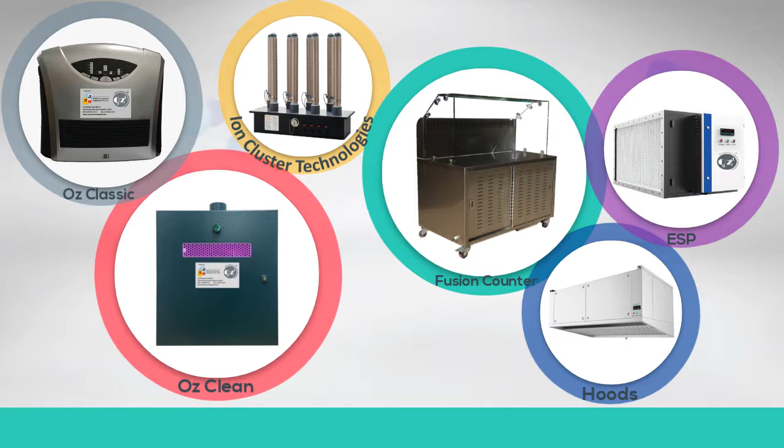Good day to all. The hybrid air cleaner system kitchen exhaust hood is a modern wonder which comprises of a functional kitchen hood with an electrostatic precipitator built into the hood. Similarly to the OZ Clean system, this solution can solve three common issues from cooking: smoke, grease, and odor. The following will be a detailed description of the product.

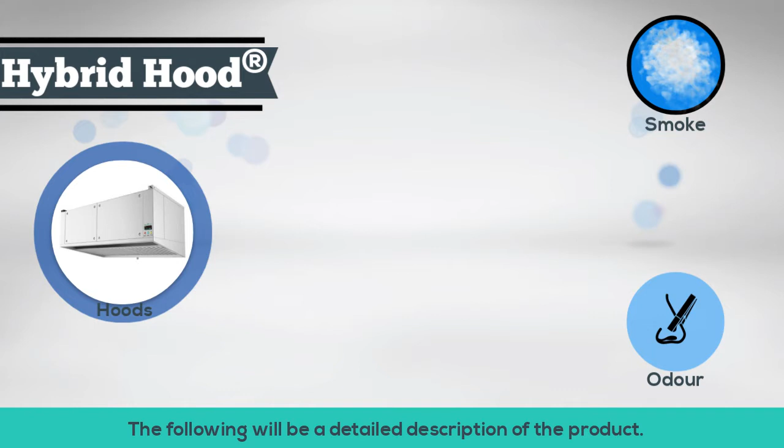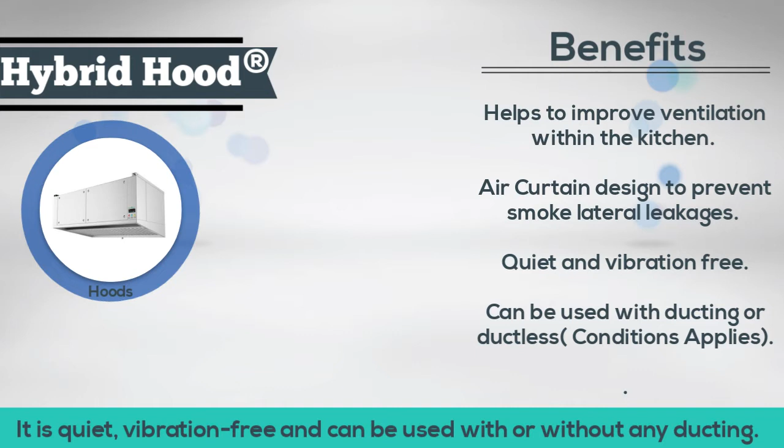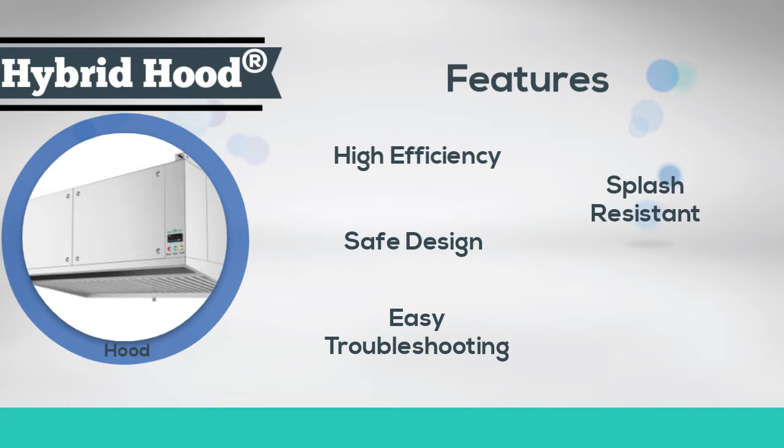The hybrid hood helps to improve ventilation within the kitchen. The air curtain design is made to prevent smoke lateral leakages. It is quiet, vibration-free and can be used with or without any ducting. Moving on, the hybrid hood consists of these features: high efficiency, safe design, easy troubleshooting, splash-resistant, durable.

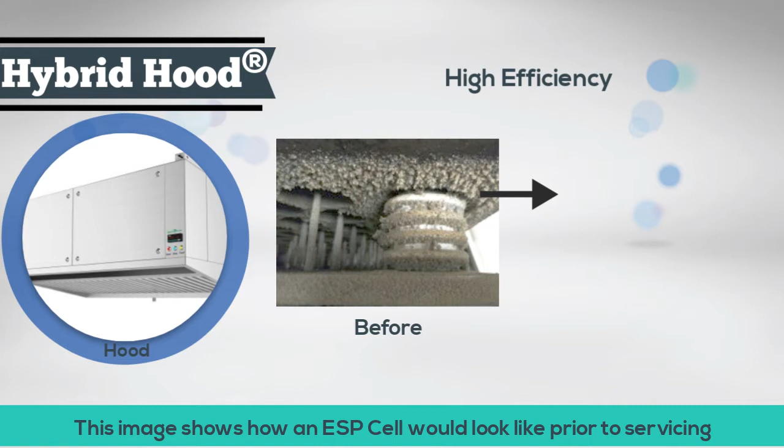Firstly, the hybrid hood system is highly efficient. This image shows how an ESP cell would look like prior to servicing. With our technology of the honeycomb ESP, incombustible oxidate are formed on the surface of the ESP cell, which makes cleaning easier and cooking safer for our users.

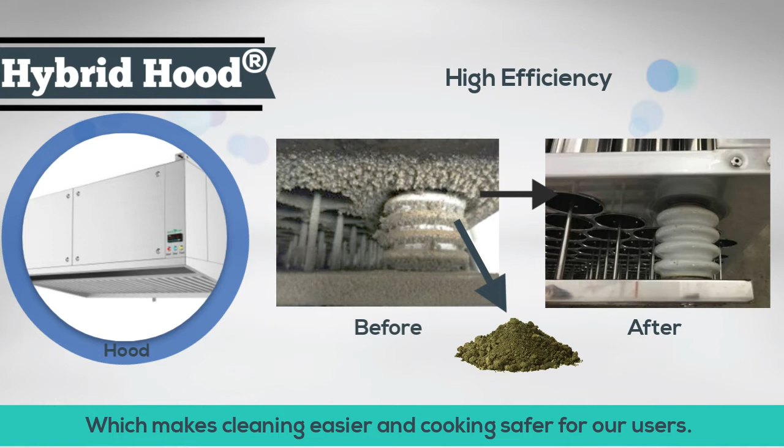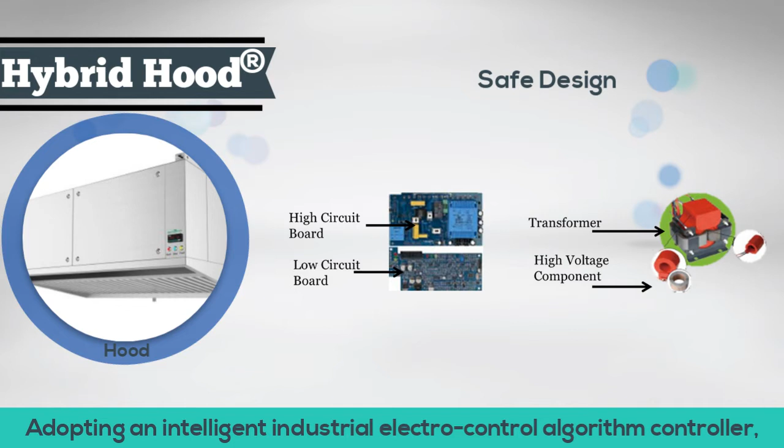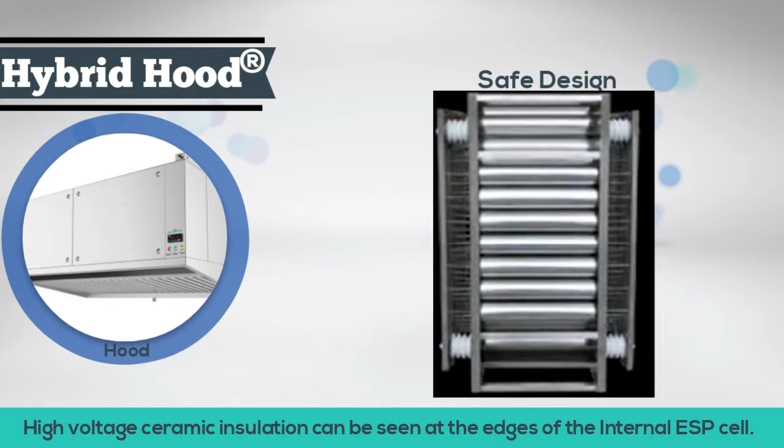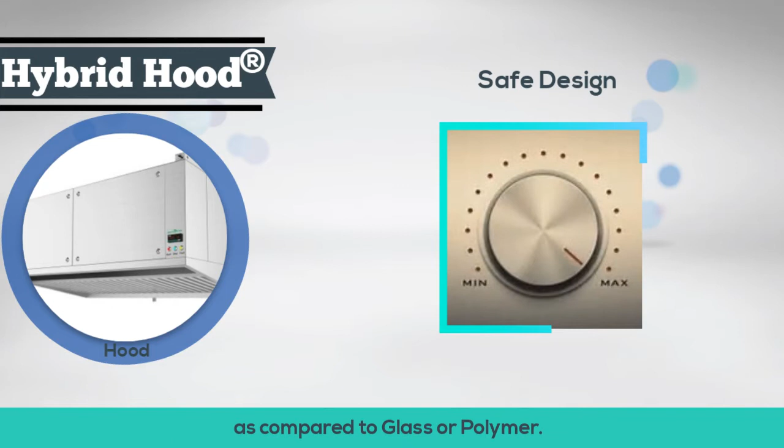Secondly, the hybrid hood system has a safe design, adopting an intelligent, industrial electro-control algorithm controller; control and setup of automation protection for cells short-circuit situations are incorporated within the system. High-voltage ceramic insulation can be seen at the edges of the internal ESP cell. It is not just environmentally friendly, but has a higher insulation quality as compared to glass or polymer. A knob is installed as well for easy adjustment of amperage.

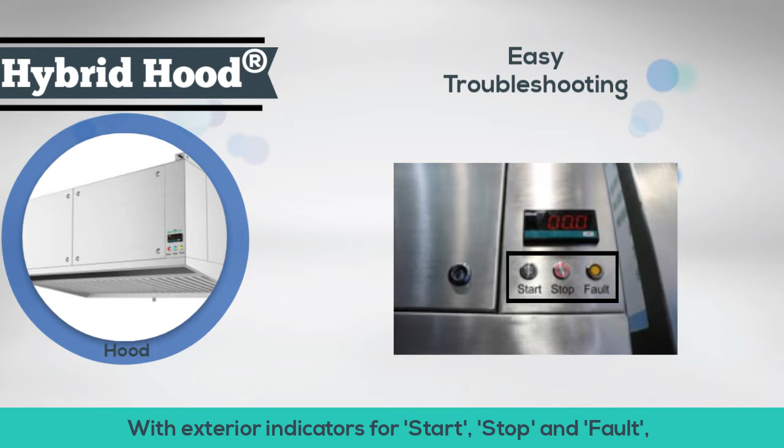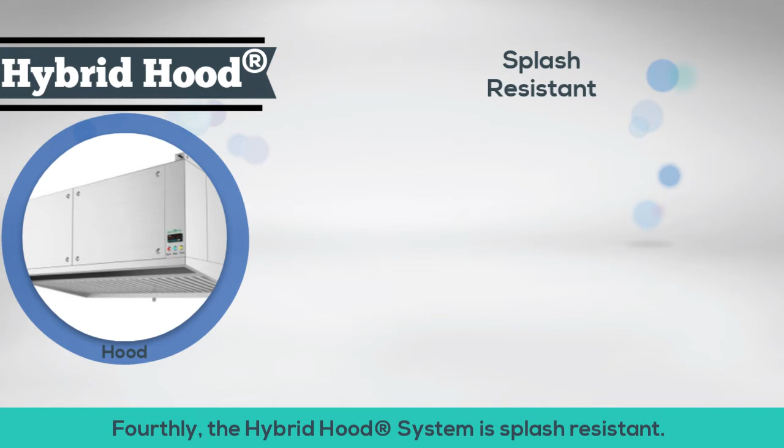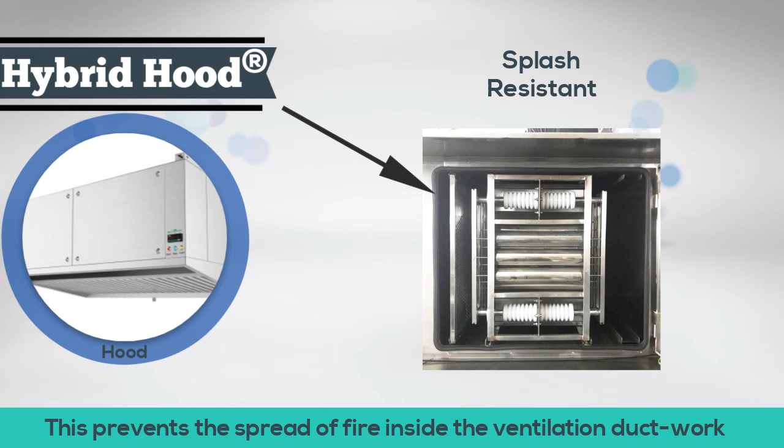Thirdly, the hybrid hood system is easy to troubleshoot. With exterior indicators for start, stop and fault, it allows for quick troubleshooting in the event of any malfunctions. Fourthly, the hybrid hood system is splash-resistant. Fire-rated materials are built in. The internal components are protected with water and grease baffle fire safety design. This prevents the spread of fire inside the ventilation ductwork and short circuits to occur.

Lastly, the hybrid hood system is durable. The product has no expiry date or depreciation in quality, as it is made of 304 grade, strong stainless steel. Nonetheless, the service and maintenance should be done on a quarterly basis to ensure that our product is functioning at its maximum capacity.

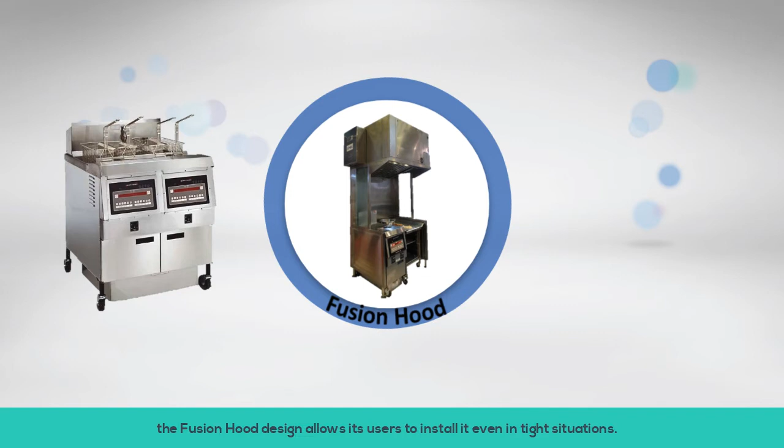Similar to the hybrid hood, our Fusion hood is a smaller scaled kitchen exhaust hood dedicated for fryers and griddles with the ability to fit up to 2 Henny Penny fryers. The Fusion hood design allows its users to install it even in tight situations. It can be sized at 1.1 meter, equipped with ozone eliminator to ensure our hood's ability to release the purified air straight back to the indoor area. Before we end off, the following are some demo videos we have done.

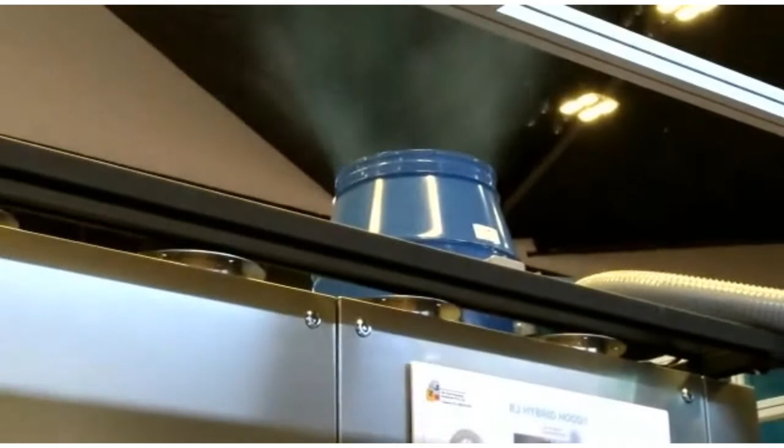Okay, today is the 25th of April 2018. Right now we are at Food & Hotel Asia 2018 at Suntec City, and we are right here doing the smoke reduction test using our hybrid hood system. Okay, smoke please. Okay, so as you can see over at the top, there's actually a lot of smoke being produced.

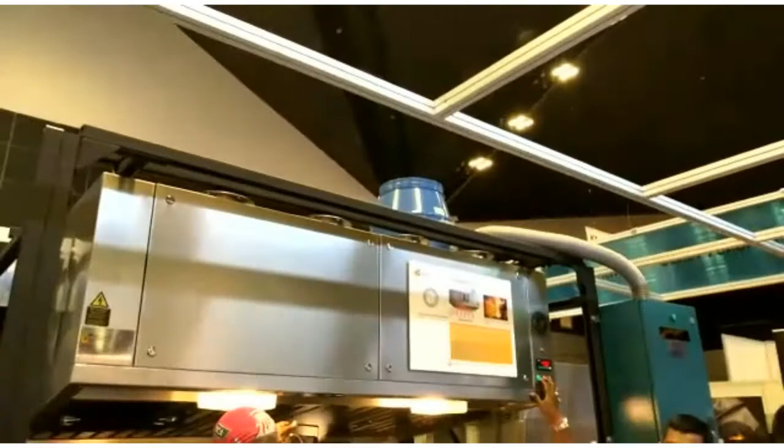Okay, right now we will turn on our ESP system. So as you can see, there's significant reduction in terms of the smoke being produced. Why? It has been oxidized by our ESP cell within our hybrid hood system. Okay, right now we will cut off the ESP cell. I'll show you. There is still a lot of smoke being produced right after we cut off the ESP system. Turn it on, the ESP. Okay, right now you see there's actually significant reduction in terms of the smoke being produced.

What we are doing now is that we are using a commercial butane burner to torch the oxidates on fire to find out if it's incombustible. As you can see, the oxidate is not flammable as it doesn't catch fire or ignite when in contact with open flame. This fire safety feature is one of many features our products are able to deliver for your kitchen solutions.